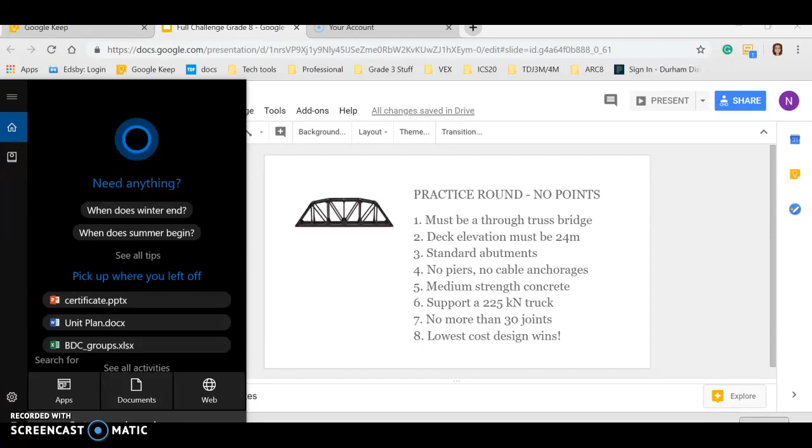If you've never used the West Point bridge design software before, all you have to do is launch it on your computer. You may want to search for it. Try typing WPBD and the program should show up. If it doesn't, try Bridge Designer and click on it to launch the program.

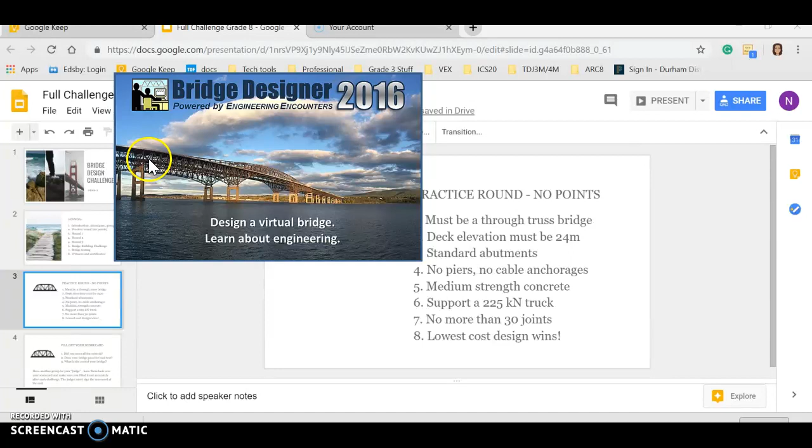I'm just going to give it a minute to open up here. Once it opens up, you want to create a new bridge design and simply click OK.

In the first challenge, you need to create a truss bridge that follows all of these specifications. This is really quite easy to do. You just need to put all of these features right here into the wizard.

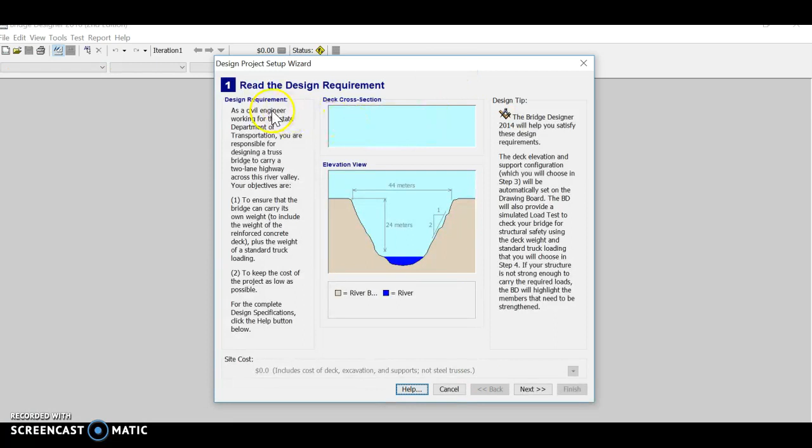So you're going to click Next on this window. It asks you if you are entering a local contest. You're going to say no. I don't see the Next button down here on my window, so I'm just going to click Enter. It takes me to the next window.

For this challenge, you need to build a bridge that is 24 meters, which is what we have here. If you'd like to change the deck elevation, you could do that through here, but we're just going to leave it at 24 meters. FYI, if you'd like to make your bridge cheaper, you want to try and build the deck elevation high, because that way you don't need to excavate the mountain and you save on excavation costs. In terms of the abutments, these supporting structures, they just want you to go with standard abutments in this challenge, so that's what we'll do.

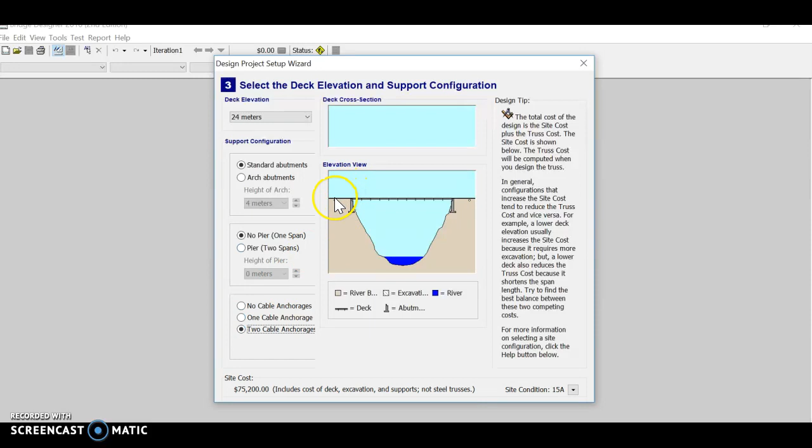You don't need a pier, so we'll leave it at no pier. You also don't need cable anchorages. You would only need cable anchorages if you were building a cable-stayed bridge. If you click on cable anchorages, you see these two little dots here, which is what the cables get attached to. But we don't need cable anchorages for this one, so I'll just leave it at no cable anchorages.

If you don't see the Next button at the bottom, click on this little arrow here. You'll see the cost calculation and a button that says Next, so click on that.

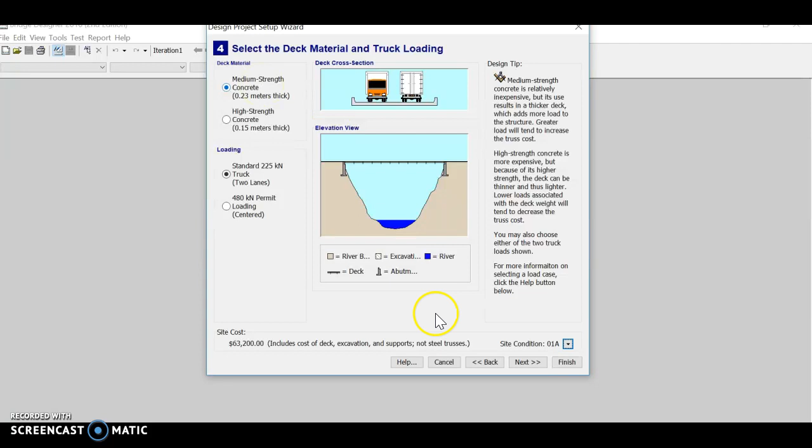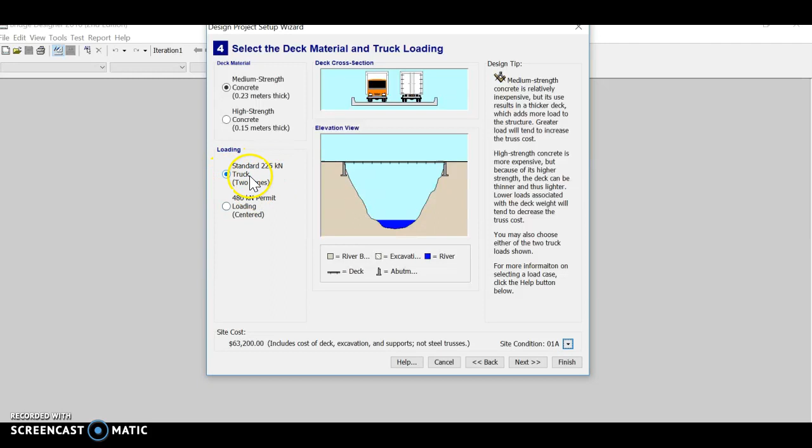Now it asks you if you want medium strength concrete or high strength concrete. Medium strength concrete is cheaper, so that's probably the one you should stick with, unless it asks you to do otherwise. In this challenge, they want you to use medium strength concrete, so we'll leave it at the default. You want a standard 225 truck, which means your bridge is going to have 2 lanes. You could also choose the 480 kilonewton permit loading, which is just one truck in the middle, but they ask you to use the standard 225 kilonewtons in this challenge, so that's what we'll go with.

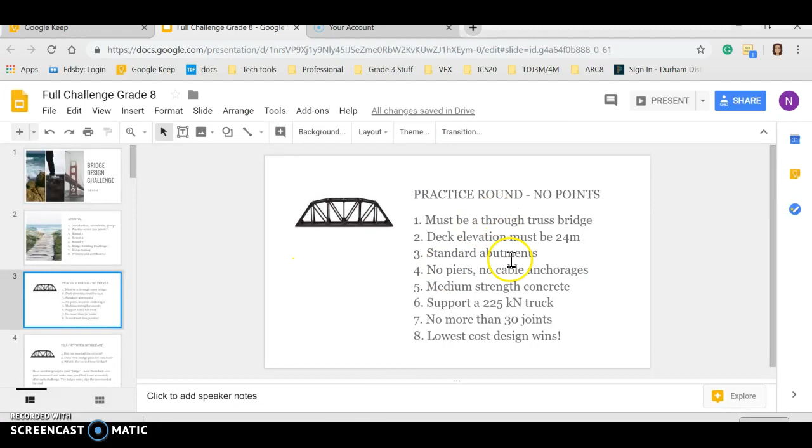Click Next again, and then based on your choices, there are a bunch of templates you can choose from. Or if you choose not to use a template, you could go with none and build your bridge from scratch. In this challenge, they don't ask you to not use a template, and it doesn't say you can't use one, so if you wish, you could just go with a template. I will in fact use a template for this one, and I'll use the simplest kind, called the Warren Truss. Then I'll click Next.

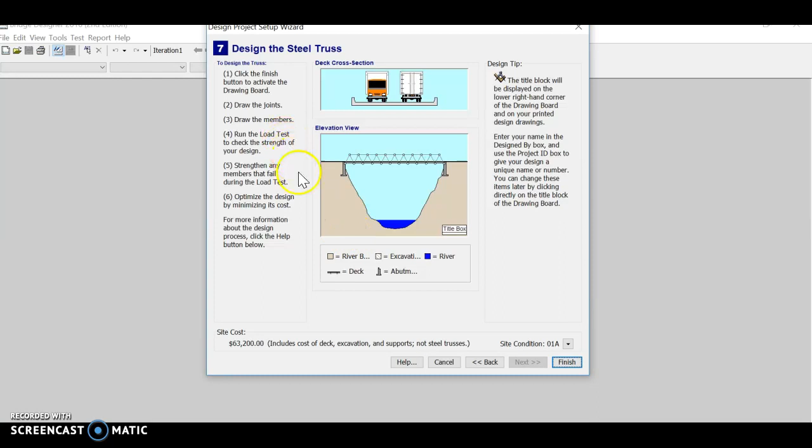If you like, you can type your name here, but you don't really have to, so I'm just going to leave this blank. Click Next again, and it gives you some instructions as to how you can go about building your bridge. You can read that if you want or not, and then click Finish.

Here's your drawing board, and we're mainly just using 2 tools. We're using the Joint tool, which you will use to draw little joints, just like so. All you need to do is click on these circles in your template to make the joints.

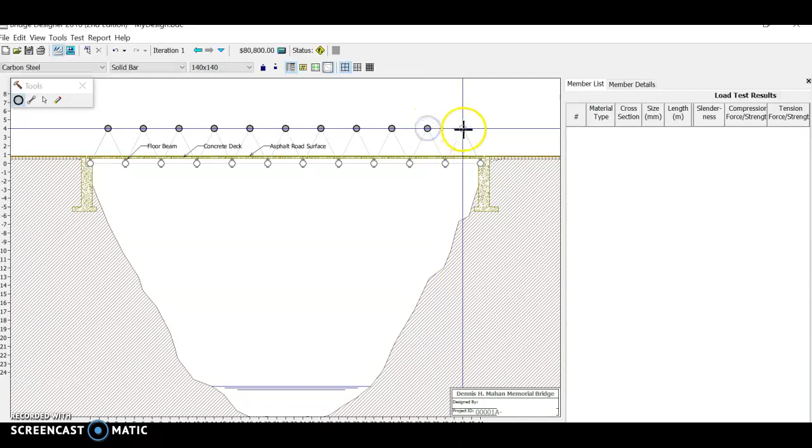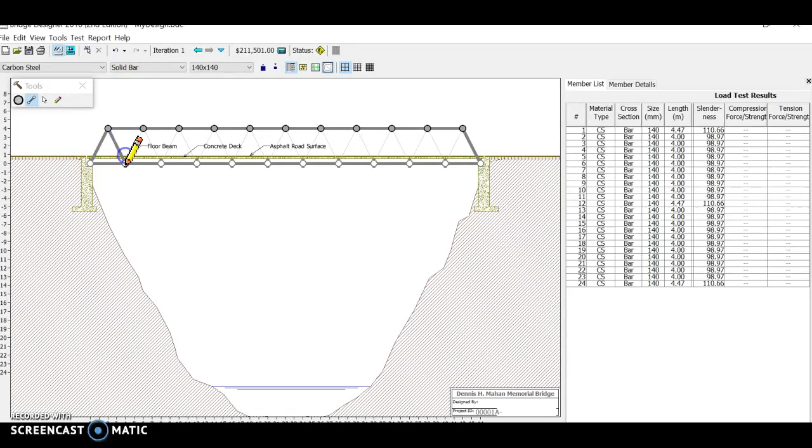The other tool we're going to use is the Member tool. Members are just these connectors that connect one joint to the next. You can see that you could draw this pretty quickly. I'm also going to connect these ones here. Just a few more to go here. And there's my bridge.

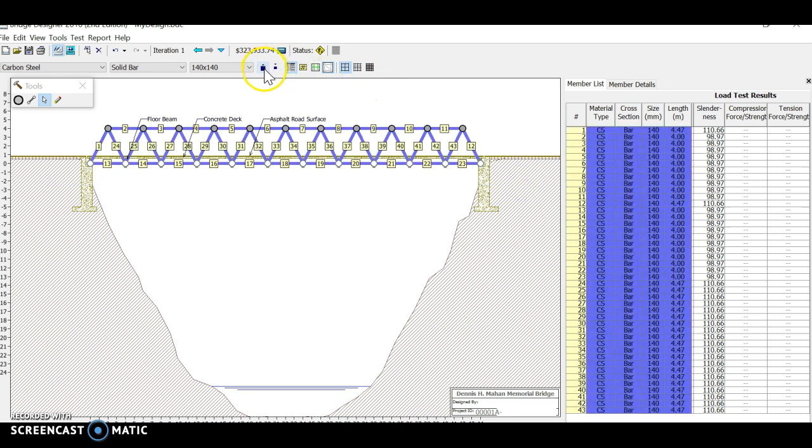Now, I actually think that these members are a bit too thin. They're at 140 by 140, and I'm afraid my bridge might break. So I'm going to select them all and make them a bit thicker, changing them to, I don't know, 180 by 180. Then I'm going to click on this blue button here, which is the load test. Once I click on that, you see a truck appears and drives on the bridge, and you see a little green arrow, which means the bridge passes the load test and is strong enough.

Now you'll notice a few things about the load test. You'll see that certain members get really bright red, and some get really bright blue when the truck passes. The red members are the ones under compression, meaning that when the truck passes, they're actually getting pushed together, whereas the blue members are under tension, meaning they get pulled apart. You'll also see that some members don't get very bright at all.

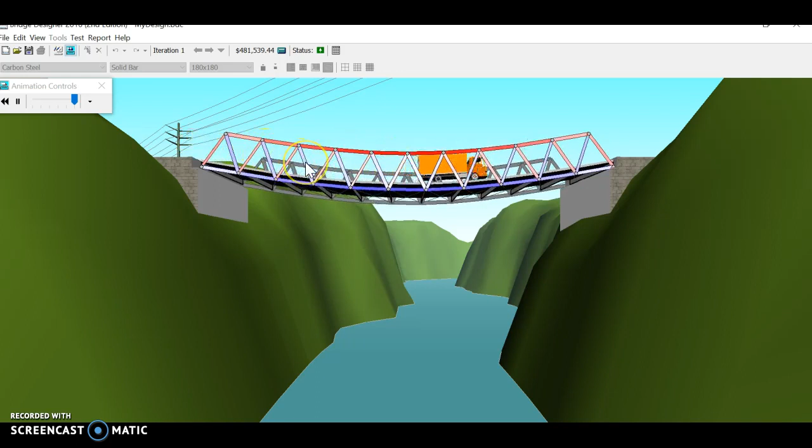These members are the ones not being used to full efficiency. If you'd like to make your bridge cheaper, you can go back, select those members, and reduce their size. For instance, I noticed this member was actually very light in the load test, so I can reduce its size, and you'll see that reduces the cost of my bridge. To make your bridge as cheap as possible, you want to go through as many members as you can and reduce their size without compromising the strength of your bridge. Your bridge still needs to pass the load test, but at the same time be as cheap as possible.

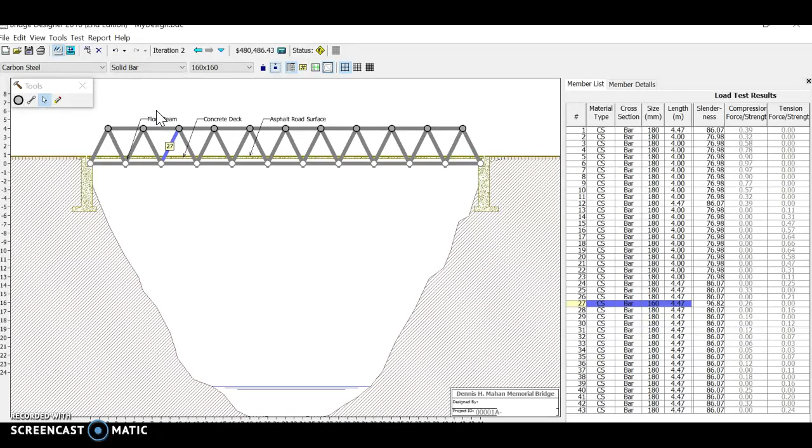In the next video, I'll go over some strategies for how you can make your bridge as cheap as you possibly can. Okay, so go ahead and build your first bridge and have fun today.